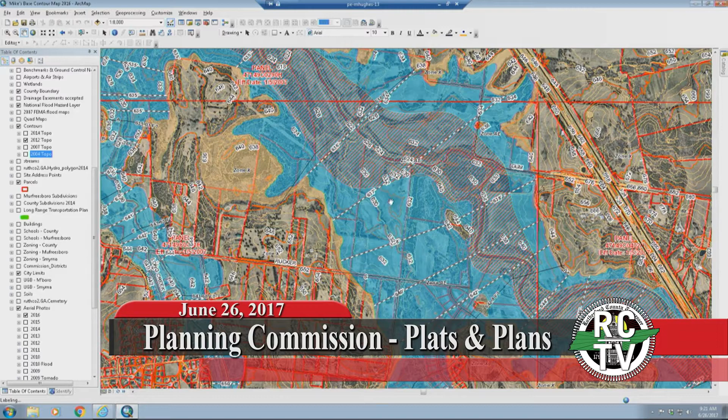So we're looking at a lot of fill on especially these lots in the back. So we're requesting that they provide us with individual lot grading plans, critical lot grading plans for all the lots, to make sure the houses are built up and protected from the 100-year flood. And just a few minor things. There's an existing culvert, I believe, underneath the driveway that crosses Buzzard Branch right here, and they need to show that. And then I believe that's about it. So

Does 12 have a house on it? No, that's just for the detention pond itself. All right, who's going to maintain that? They'll have to have an HOA to maintain that and serve that.

HOA. That's our favorite scapegoat. Yeah. Catchphrase these days. They'll be non-existent in 5 years.

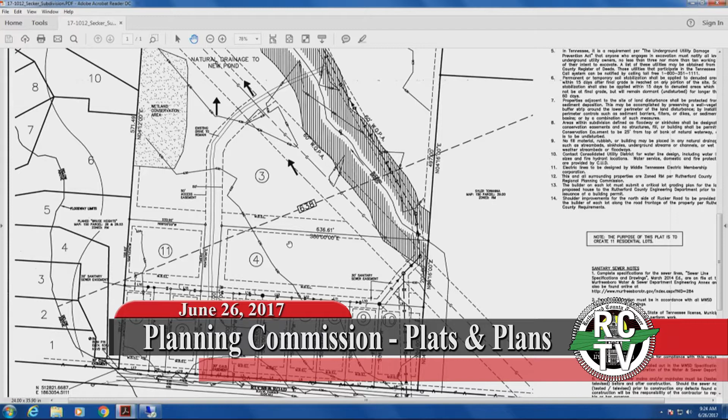Right. You can see the base flood elevations. It's 638 in this area right here, and there's an existing 632 contour. So they'd have to build the pad up, say like on lot 4. They'd have to build it 1 foot above that 638, to 639. So that's 6-7 feet of fill on lot 4 itself. So these are going to be some challenging lots to build on.

That's just for the house itself, not the entire lot, so. Right, we don't do the 15,000 square feet anymore. Yeah. Just the pad, like 5-10 feet out from it to protect the HVAC unit and the ductwork underneath the house.

Doug, your preference is to combine it between lot 1 and 2 to have just one access off of Rucker, or you're okay with 2? Oh, well, in that situation, I think what we're saying is like with 5 and 6, 7 and 8, something like that, pair the driveways so that they're closer together. Lots 1 and 2 down there, you've got lot 11 between it. I don't know if that'd really be an option for that one. But what we're trying to do is just minimize the number of cuts onto Rucker. There'll still be that many access points, but if they're paired, it's really acting as one. For all intents and purposes, it's really more 1 than 2.

Seems like there's still a lot of issues to be worked out with this one, from your perspective, or you feel like this is? Well, as far as our comments are concerned, there's a few things, but nothing that really would rise to the level of any kind of a deferral, I don't think. I'm sorry, we'll still need to see construction plans for the pond. We'll still need to see individual lot grading plans. That's why I was saying that all the property is in the floodplain, so each lot where they're proposing to build will need a critical lot grading plan. But those are things that would have to be worked out in the future anyway.

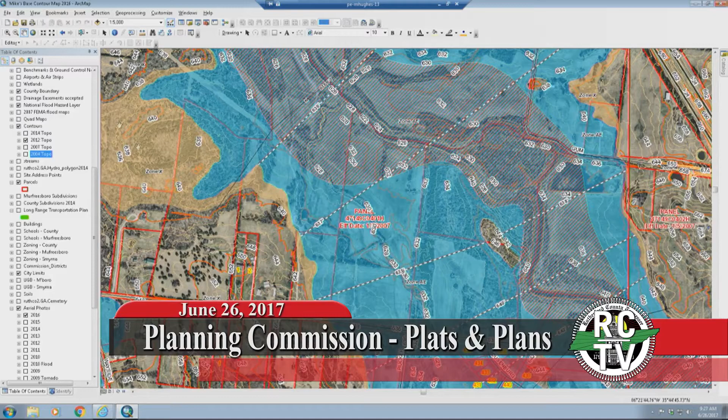All right, got another nice piece of property on the north side of Valley View. It is very, very steep. And these lots, you can see from the tightness of the contour lines that it's pretty steep. These individual lots will need critical lot grading plans up here on this side. You can see these large lots up here. They are planning to extend sewer, a force main to connect to the STEP system, so that won't be an issue for water or sewer. But just the steepness of the lots will require them to have critical lot grading plans.

And another issue I had was, like Doug mentioned, this intersection here. Right in here is a little bit too acute of an intersection. It doesn't meet our standards. We'll need them to flatten this out. We try to get the intersections at a 90-degree angle, especially if it's on a major route from Valley View. They can either come down Millstone Creek and then out to Jefferson Pike, or come down Ash Ridge and over to Jefferson Pike. So we feel that this is not going to be a minor local. It'll be more of a residential collector route where a lot of traffic is going to be coming through. So I'd like them to work on this intersection a little bit more.

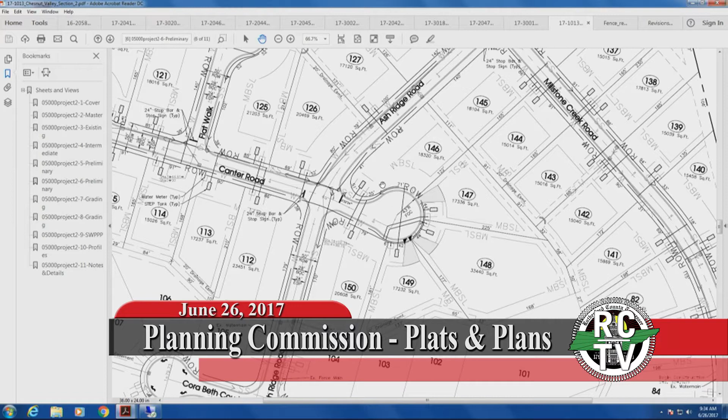Right now, their stop conditions are these two side streets, so people are going to be coming through there not stopping at all. So we need that to be two-way, not a four-way. Sir? A proposed two-way stop. So they're proposing a two-way and not a four-way intersection. So traffic's going to be coming through there pretty quickly, and just based on our regulations, we need it to be a little bit flatter, more of a 90-degree angle.

Would a four-way stop sign affect your decision on the angle? Well, we could do that. Well, and the fact that you have a cul-de-sac there. I'd rather see it worked on a little bit. I think they can adjust that a little bit and make that work without losing any lots. It just needs a little massaging, in my opinion.

Personally, I would like to support the county engineer, because if we start saying, well, this one's going to work at 80, next time we're at 75, and all of a sudden we start down the slope, and we've got a rule in place. I mean, it's all on paper at this point in time. I feel sure you can tweak this a little bit and make this work. Yeah. Well, we're currently at 83 degrees. Yeah. So we could bump that up a little bit. Thank you.

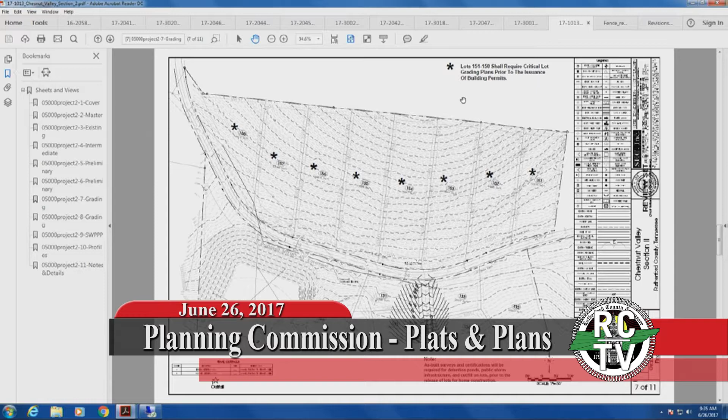But other than that, it's in good order. We'll catch a lot of stuff on the construction plan submittal. And like I said, the lots on the north side are pretty steep with these steep contours, so we'll need to see house plans from each one of those. And they have added a note saying that they are critical lots and will require critical lot grading plans. Questions for staff?

No further questions. I'll make a motion to approve subject to all staff comments. Second. I have a motion and a second to approve item 17-1013 Chestnut Valley Section 2. Ready to vote? All those in favor of that motion to approve, please say aye. Aye. Opposition? Motion to approve carries.

Next on our item is 6C, submitted for final plat approval, but before we get into that, I'd like to recognize longtime Commissioner Robert Stroop. Saw Robert walk in a few minutes ago, and it's good to see you, Robert. Back up here, you spent years and years, and you were a valuable part of not only this commission, but the community as a whole. Good to see you again. Glad you're here. Oh, yeah, very well, but I have to believe that was not detrimental to me. It was not. Good to see you, Robert.

Item 6C submitted for final plat approval. 6C1, item 16-2058, North Side Estates, Section 1, 60 lots, 58 are buildable, on 49.07 acres zoned RM, located along Lascassas Pike, State Route 96. Oakland Developments is the applicant. Doug. Yes, Mr. Chairman, thank you.

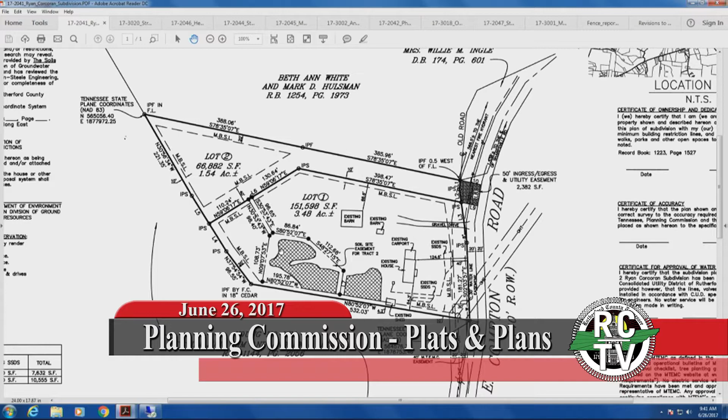It's just a little neater and cleaner when it's all on the same lot. Agreed. 20 years down the road and the houses have changed hands. If somebody goes to put in a pool or something, all of a sudden they're digging in the neighbor's septic system, or if there's a problem, you're over digging up the neighbor's property. I mean, I'm just a little bit uncomfortable. I don't want to start doing this on a large scale development purpose.

Recommendations? Questions? Staff okay? We're fine with it. I mean, for what they're requesting, like I said, it really would just be the one waiver if it wasn't for that little remnant portion out there. That just was a little unusual.

Is the lot to be sold for profit, or is it for a family member, or do you know the situation? Off the top of my head, I'm not sure if the applicant's present. Doesn't look like it. I'm not sure which it's for.

Need a motion? I make a motion that it be approved with all staff comments. Thank you, David. We have a motion and a second to approve item 17-2041, Ryan Corcoran subdivision. Any other questions? All those in favor of the motion to approve, please say aye. Aye. Opposition? The motion to approve carries.

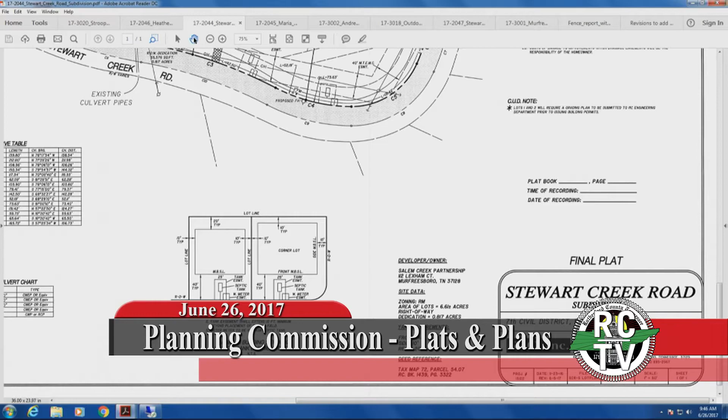They did add driveway culverts for lots 3 and 4, but they kept this note, two 30-inch culverts to be used for future driveway. The two 30-inch culverts are actually smaller than what will be required for lots 2 and 3. There'll be substantial size culverts. There'll be at least two 38 by 60 elliptical culverts probably needed for that one as well.

There's a large drainage area coming across Stewart Creek Road, and then get this mouse to work. Okay, and that goes across here and then to the northwest. So we'll need them to adjust that. And there's a large, what I was trying to turn on, come on now. Technology's great when it works for you.

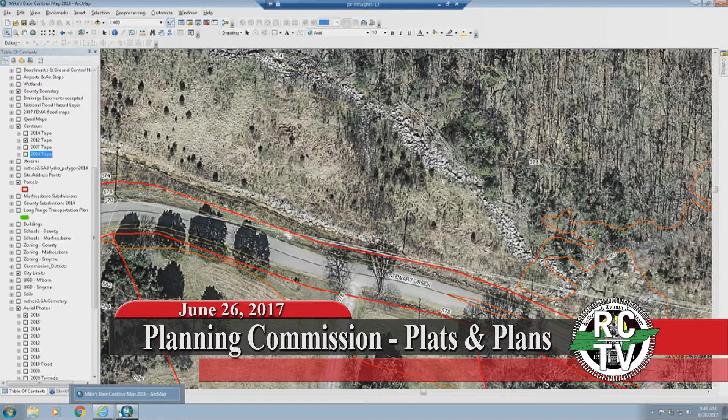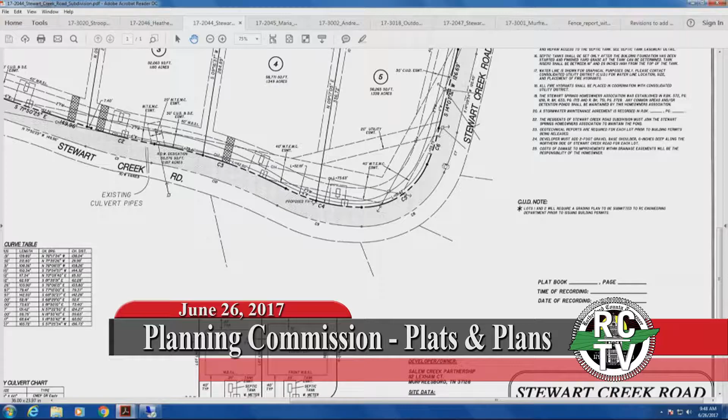There's a large drainage channel that runs through here that we need them to coordinate with CUD with the septic tank locations. Looks like they might be in that drainage area, these 2 lots here. Make sure those are pushed out of that area. They need to rework the numbering on their lots. They took out a note but didn't change the numbers, just minor things like that. But all in all, with those few changes, I believe the plat is in good order.

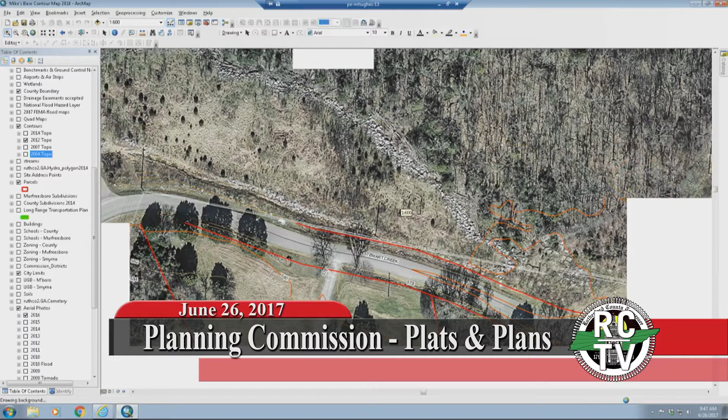Okay, note 23, I think it was numbered now. Geotechnical reports will be required for each lot prior to building permits being released. And the reason for that, you can kind of see on this plan, this was an old spoil area for Travis Estates subdivisions directly to the west. And it's just an old rock pile in here, so we're asking them to provide us with geotechnical reports for all this material that was just dumped in here.

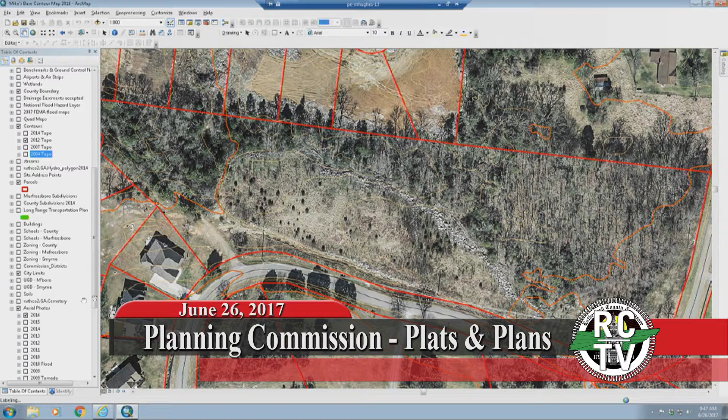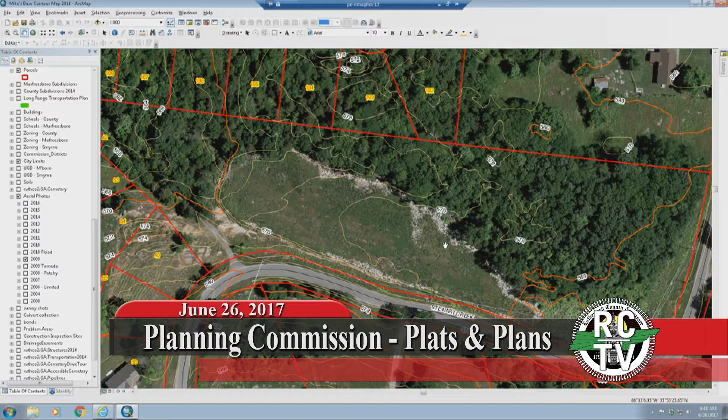I think you can kind of see it back farther in history. 2007. See, this is where it started to become a waste site. 2009, I think it's a little bit more, but you can see the outline of it. This is where they brought the material in. They'll just need to have that evaluated before the house permits can be pulled and make sure that they're suitable building sites.

How much will they do? They just do the site for the absolute house? Will they do driveway areas? Well, usually just where the house will go, and the area outside of that, just to make sure that the house won't see any substantial settling over time. And it's probably good building material. It just needs to be evaluated, possibly some of it removed and brought back in and compacted properly.

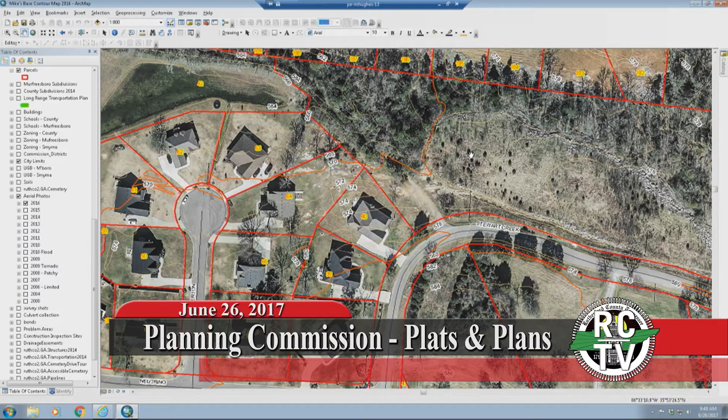I'll make a motion to approve subject to all staff comments. Thank you. We have a motion and a second to approve 17-2044 Stewart Creek Road subdivision. Any other comments or questions? Did you say it was the same developer? Yes, same developer, and it's a landowner that owns the pond, it's a farmer, and he did grant a consent to drain letter as well.

Other questions? All those in favor of the motion to approve 17-2044, please say aye. Aye. Opposition? Motion to approve carries. Thank you.

Item 6C5, Maria U. Adams property, item number 17-2045, 5 lots on 3.57 acres zoned RM located along Parsons Road. Maria U. Adams is the applicant. This also includes a waiver to the fire hydrant requirements. Doug. Yes, Mr. Chairman, thank you. This is another unusual situation here, and I'll try to explain why. The Planning Commission originally approved a 2-lot subdivision, Lot 1 and then Lot 2 as the remaining property, back in January of this year.

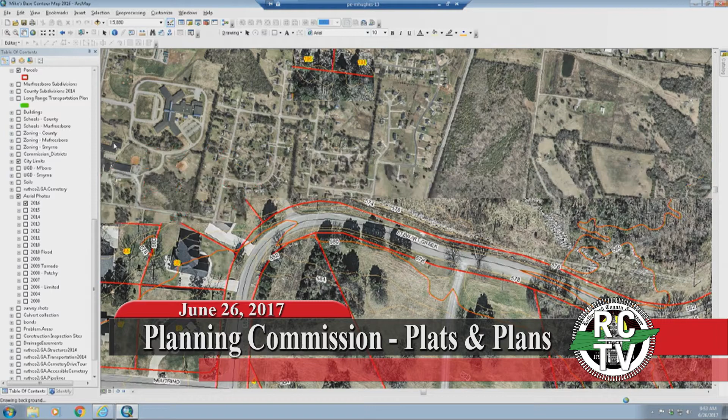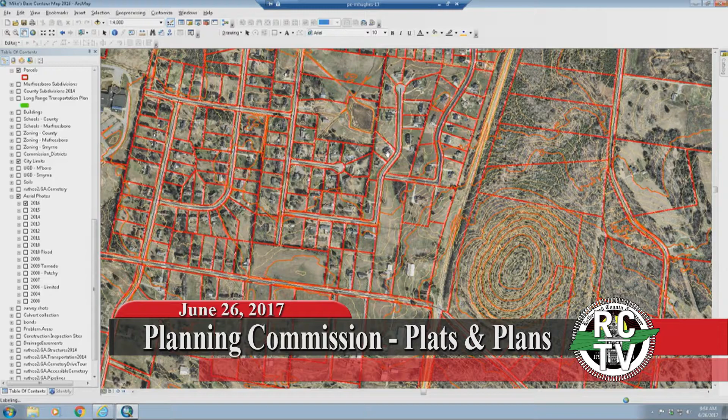Okay, this is the Maria Adams property here, and then this is a large pond that Public Works excavated to provide some more capacity in, and it does drain to that pond, but it's on somebody else's property. So without getting a consent to drain letter from this landowner, we need to know how the stormwater quality and quantity will be addressed for these new lots that are being created.

If they don't get a consent to drain letter, then they'll have to build their own retention pond, is that how that might work? Yeah, the way we work with them is to find a location on each lot, which will be challenging because of the soils area on each lot, because it's conventional septic systems.

Doug, Mike, either one of you guys, there's a number of things that have been brought up. Is this thing ready for final plat? I wonder how you're gonna use lot 2 at all. Yeah. Well, and quite frankly, let me pull that back up here. We had talked with the state officials at TDEC regarding some of this soil right through here, and said that even though this is shown as usable soil, for all intents and purposes, there's really not a whole lot you can do with this large stretch right here, because the width of it is not wide enough for the septic system, plus trying to get the driveway in there and everything.

So this may not be able to be counted as usable soil, even though they are showing a lot back here. So that's something the applicant's going to have to work through. This guy's going to have a driveway all across his front yard. Yeah, where's that house faced? The driveway's tucked in back here somewhere, number 3. I mean, looks to me like that would have been 4 pretty good lots, but you're trying to squeeze in 5 and making a mess. Exactly.

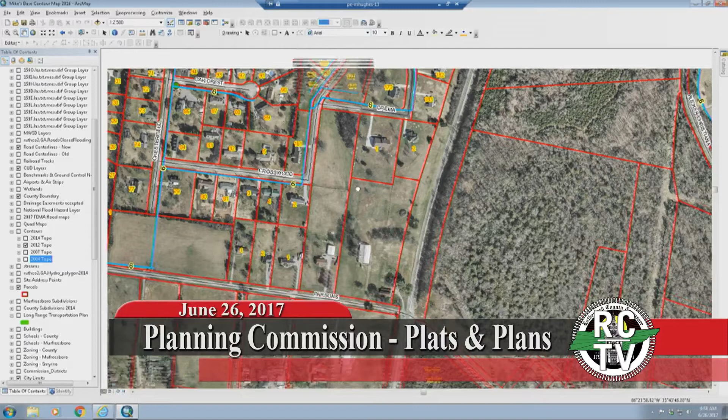So, I'm sorry, I might have missed it. The water line will not support a fire hydrant? Well, there's no water line there for lot 1, Parsons Road. Right, this house here and barn will be lot 1. The water line coming in the backside supports 2 through 6. There's an existing hydrant there already, a little bit farther up the road.

Okay. But that will cover those lots? These will be within range of a fire hydrant. And that one was already approved; the house was already built, so it didn't have to have a fire hydrant. So should there be a plat note indicating that that waiver only applies to lot 1?

Well, again, if they're going to record lots 1 and 2 separately, that first plat, then the subdivision we're looking at here would only be for lots 2 through 6. So it wouldn't have to, because lot 1 would just be all by itself. The note would already exist on the first plat that was recorded. But again, that was the question we had. Why not just do it all at one time?

I'm not comfortable. There's too many unanswered questions, I believe, for staff for us to consider this as a final plat. I'm going to make a motion we defer. Second. Let's see if we can get that drainage figured out before it comes back. Yes, sir. We have a motion and a second to defer item 17-2045, the Maria U. Adams property. Other questions?

Well, I'm just gonna add another statement here. We just did that in January, breaking into 2 lots. Now we're back breaking into basically 6 lots. I mean, I feel a little bit like we're being played here to some extent, you know, and I'm not comfortable with that 5 lots, that back half. It looked a lot better to me with 4. Personally, I don't like the way number 2 looks at all, so.

And can you see how much soil lot 3 has? I think they only had enough for maybe a 2-bedroom house, so maybe 3. Go down to the soils chart. Lot 3 only has 6,685 square feet, so it'll be a challenge to get 3 bedrooms out of that. Okay. All right, we've had a motion to defer and a second. Any other questions? All those in favor of the motion to defer item 17-2045, please say aye. Aye. Opposition? Motion to defer carries.

Thank you. Item 6C6, 17-2046, Heatherwood Section 4, 61 lots, 59 are buildable on 31.87 acres zoned RM, located off Florence Road. Gibson Development is the applicant. Doug. Yes, Mr. Chairman, thank you. The preliminary plan for this section was approved by the Planning Commission back in October of 2016. This plat is consistent with that preliminary plan. We did have several issues that we identified. Those issues have been addressed. I will turn it over to Mike. I know he had a couple of items on the stormwater side to address.

They have walking trails around the center retention, detention area. These are common areas, this long parcel here, but in a few places, and I'll zoom in to show you, you've got detention drainage easements coming and then just abutting this common area. We just ask that they extend the drainage easement across this common area. They are proposing culverts underneath the walking trail, so just to make it all above board, cut and dried, we'd like that to be addressed.

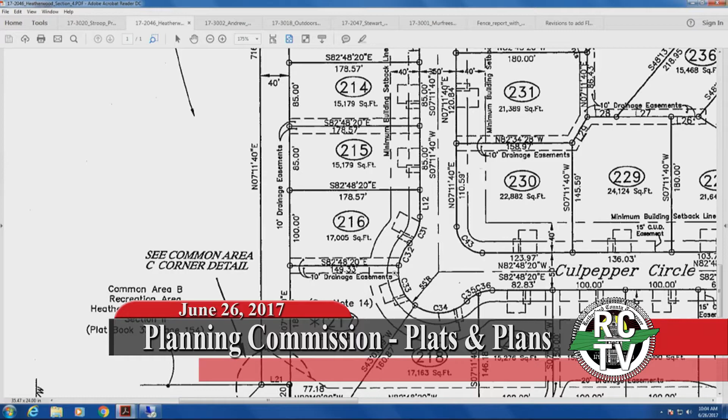And then also they need to tweak a note about the responsibility of repairing anything in a drainage easement. So if this is piped through here and somebody puts a driveway or a mailbox or something in that piped drainage easement, and we have to go in there and work on it, it's a note stating that it's the responsibility of the homeowner to replace that item because they placed it inside our drainage easement. It could be landscaping or anything, any kind of improvements. A lot of times we'll see driveways squeezed in here because of the large septic tank easement, the water meter easement.

But other than that, I believe they've addressed all our comments. So just a couple minor housekeeping issues. Those notes will be made on those lots so that a potential homeowner will know what he's... Yes, sir. Right. So it'll be recorded with the plat. It'll be closed. Make a motion to approve, subject to all staff comments.

Second. We have a motion and a second to approve 17-2046. Any other questions? All those in favor of that motion to approve, please say aye. Aye. Is there any opposition? Motion to approve carries. Thank you.

Item 6C7, 17-2047, Stewart Aaron Carlton subdivision, 5 lots on 2.6 acres on RL located at the southeast intersection of Highway 99 and Mount Vernon Road. Stewart Aaron Carlton is the applicant. Doug. Yes, Mr. Chairman, thank you.

This property probably looks familiar to commission members. This was the subject of a rezoning request to residential multifamily that was denied by the commission back in March of this year. After the meeting, the applicant didn't take it to the Board of Commissioners. He ended up withdrawing the application and then is now seeking to subdivide the property into 5 lots.

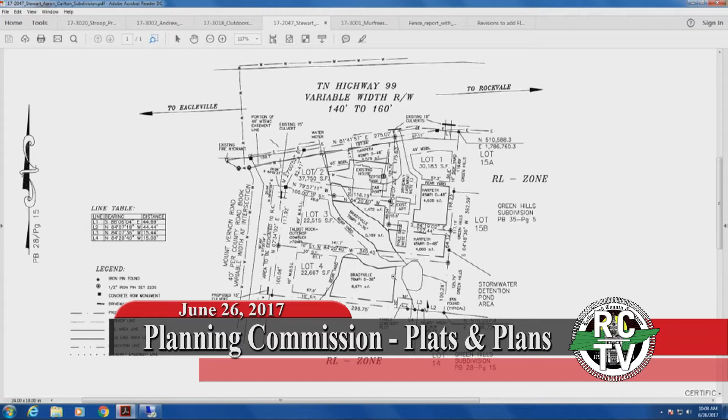He'll also need to trim out some old soil markings on here that just need to be taken out. The calculations that are shown on here actually are shown with the trim out area. He just didn't turn the lines off, and he said he would take care of that. So from that standpoint, those were a couple of the major comments that we still had. Mike, I think you had a couple of things that you wanted to discuss on that one. But for the most part, from our standpoint, this appears to be in fairly good order. I think you covered it.

Okay. And Mr. Tusar, Len Tusar, the surveyor, he is present. I guess, yeah, Brad, Aaron's here as well, excuse me. Where's your stormwater area? Can y'all point it out, or what are we doing here on drainage? Well, I guess that's one of the things we'll need to address. Mark, to my untrained eye, this is very confusing. It's hard to tell what's what. I agree with you totally, yeah.

Okay. Yeah, it had a comment: need to show post-development runoff is equal to or less than pre-development runoff, otherwise show how you'll mitigate excess. See, there's the existing house on lot 1. This could be a detention pond or individual rain gardens. This is lot 1. To meet Rutherford County standards, how will stormwater quality and quantity requirements be met for this project? So that's one thing we need to address on that too.

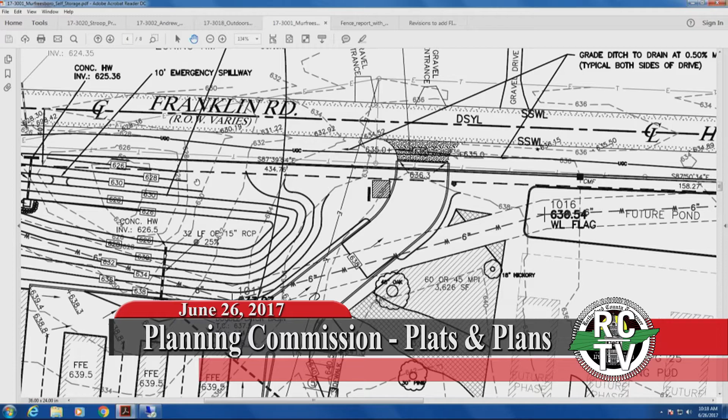So it's not connecting anything. We'll need them to fix that. Trench drain would be just a trench. Just a trench. Well, grate or something. Grate across it either way. Right, but it's got to be connected to the pond. Yeah, it should drain back into the pond. They could move it up farther in the driveway.

TDOT usually doesn't allow additional water running off into the roadway, and they usually have a note on the plan saying the pre-development flow for a 50-year storm meets the post-development flow for a 50-year storm, so they're not running any additional water onto them.

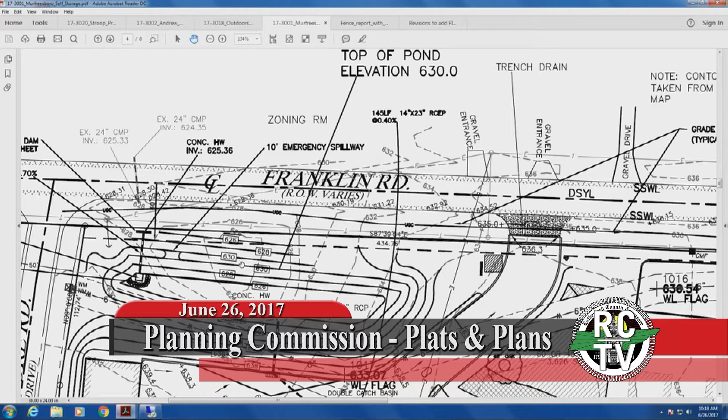This existing pond is actually a mapped wetland, so we'll have to get them to address that. I think it's small enough they won't need mitigation, but they will need some coordination with TDEC on that. Let's see what else. And just a few things like forebay designs for the pond, energy dissipation for the pond, details for those items. Let's see. And I believe that's all I had for that.

So just some more fine tuning of the plan and working with the utilities. With some grading operations going on in this area, like I said, we don't want to uncover too much of that water line and leave the water line susceptible to freezing. I didn't realize we could have a water line under a detention area. You say we can, I guess we can. Well, I've done it before in my previous career. As long as they can get to it and work on it, and maintain it.

It's CUD's water line. It's their easement. Took for granted they had an easement. I didn't know we could put something else in their easement such as that. My main question is, this is the PUD, and the PUD comes pretty much set in stone, and now we're adding 2,900 foot of building. Is that not a variation from the original?

Well, the original PUD, yeah, the PUD booklet didn't actually call out specific sizes. It did show the buildings. Now, what they're showing really isn't a deviation. The buildings are still where they were proposed to be. So from that standpoint, and that's actually a discussion that the applicant and I got into, because at first she didn't think she would even have to come back to the planning commission since the sizes weren't really mentioned in the plan booklet anywhere. But I said, well, that's really not the issue. The issue is the size that was approved originally on the site plan. But the buildings, locations, and setbacks and everything else that they're proposing, nothing has changed in that regard.

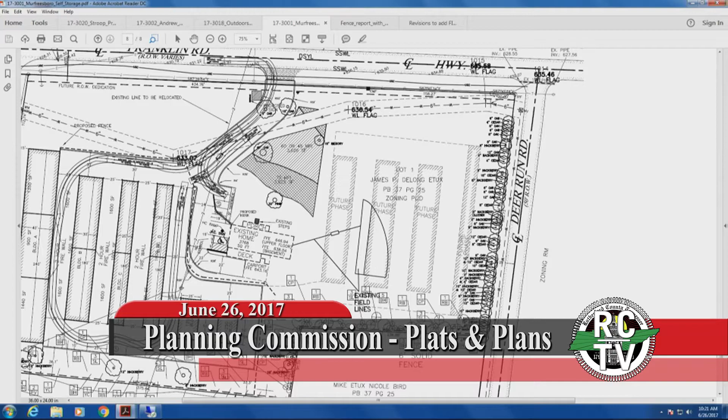I'm sorry, on page 2 of the plat, if you go just below the house, it's labeled proposed gate for future access. Is that just access from their future phase development? It's not access from Deer Run Road, correct? Correct. That'll be for this additional future phase in this area. And then while you're circling that, are we going to allow those buildings to remain labeled future phase when they're sitting on top of field lines? That's why they identified this area up front by the driveway, and this mouse is not liking me anymore. Right here. So once they start this phase, they'll have to move their septic system to this area.

Is there buffering on the landscape plan for Baltimore Road on the Baltimore side? There is. Go ahead and. Well, they're actually going to. You better drive. It doesn't like me for some reason. Let's see. Back one. Okay.

They're actually using the backs of the building. These will be kind of dressed up a little bit more. The back of this building will act as a wall, as a solid visual screen, as well as some landscaping along here, along Baltimore Road. Okay. So yes, they will have to do that. Now they're proposing to use a lot of these as tree credits. You are permitted to do that. Again, the landscape plan is still, I think, kind of a work in progress. I know that the applicant had some issues with what was being proposed, and we'll work through that, but we'll make sure that it meets our regulations as far as screening and landscaping.

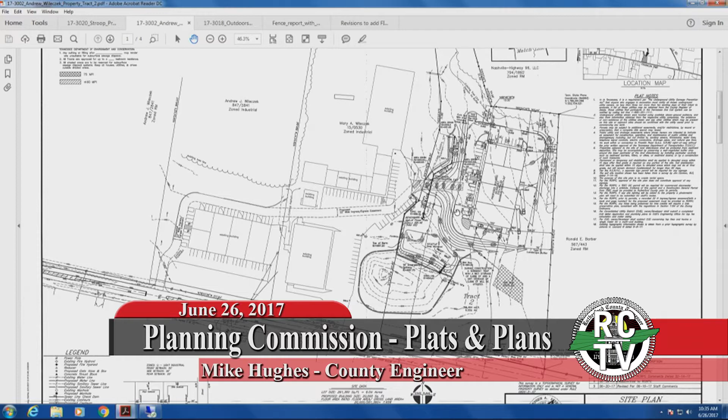Let's see. Doug had a note about tree preservation for tree credits on there, and then just some minor tweaking on that, but like Doug said, they have addressed most of our comments. Staff recommendation. I mean, we're okay with this. I think we recommend it can move forward. Motion to approve. Second. We have a motion and a second to approve with all staff comments.

Item number 17-3002, Andrew Wilczek Property Tract 2. Other questions? All those in favor of the motion to approve, please say aye. Aye. Is there any opposition? Motion to approve carries. Thank you.

6D3, 17-3018, Outdoors Unlimited, conversion of 5,252 square feet existing building to non-residential equipment storage, proposed construction of 4,260 square feet carport on 2.8 acres on PUD located along Rockvale Road. Burke Skelton is the applicant. Doug. Yes, Mr. Chairman, thank you. Again, this is another zoning application that should look familiar to you. This is along Rockvale Road. The property was rezoned to planned unit development by the Board of Commissioners back in April of this year.

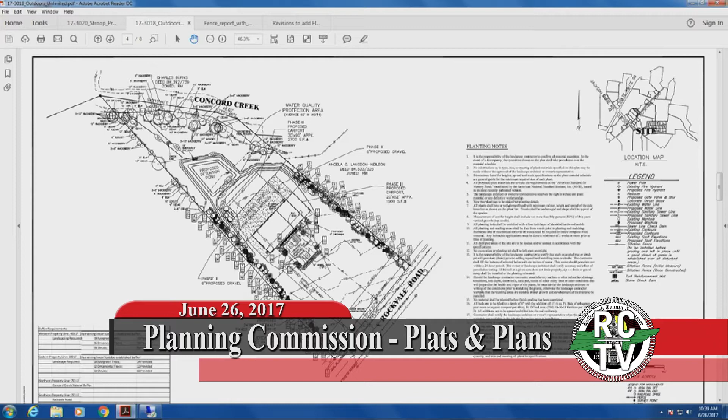And like Doug said, they are proposing a lot of vegetated screen on either side of the property and around the parking area, and they're keeping this buffer in the back along Concord Creek. Staff okay with moving forward with this? Yes, I mean, like we said, some tweaking, but for the most part, it's in good order.

Motion to approve based on staff comments. Thank you. We have a motion and a second to approve item 17-3018, Outdoors Unlimited. Other questions? I have a question. It says that the closest fire hydrant is over 1,000 feet away. Are they adding a fire hydrant? I don't think the line in that area will support it, it's a 4-inch line. Yeah, but they'll have to work with Larry Farley, our fire chief, as far as any proper fire protection measures in the actual building itself.

Other questions? All those in favor of that motion to approve, please say aye. Aye. Any opposition? Motion to approve item 17-3018 carries. Thank you.

6D4, item 17-3020, Stroop Property Building Addition, new construction of 7,500 square feet of light industrial space on 25.89 acres zoned LI located at 4700 John Bragg Highway. Robert Stroop is the applicant. Doug. Thank you, Mr. Chairman. Our last site plan that we have today, the applicant is proposing to construct a 7,500 square foot building as well as some lean-to structures. It does not appear to be attached to the building. It's been confirmed that it's not.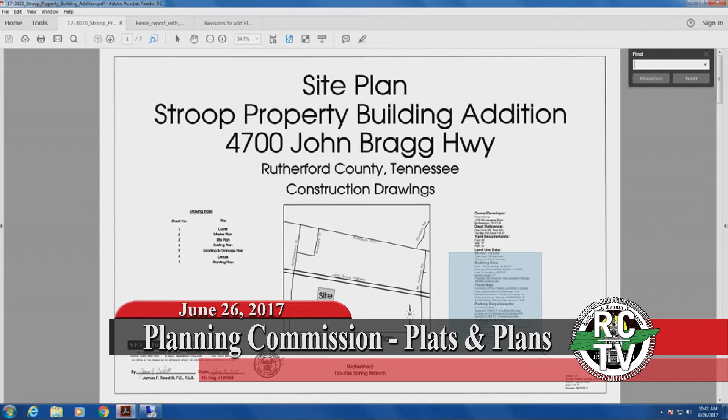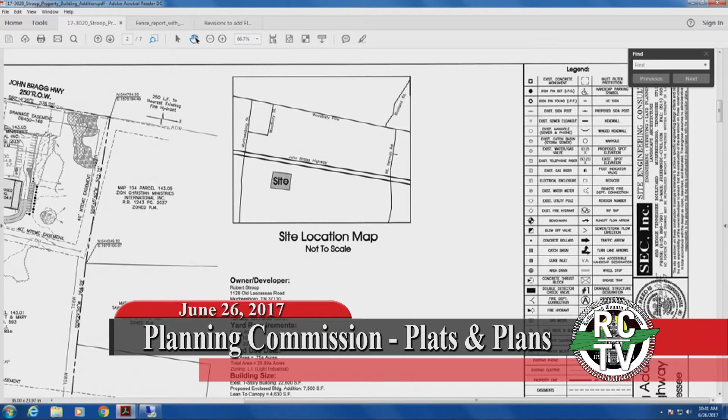We have asked them to make several updates to the plan. Most of our comments have been addressed. One of the comments that we had is on the first page. Let me just zoom in there. I hit the wrong button, hold on a second. There we go. They had originally included just the proposed building addition, but they weren't including the lean-to canopies and all that as far as the building size and the data. They've updated on the title page, but on the pages moving forward, they're still just showing it as the building itself. So we just asked them to update that. That's a minor change that can be done pretty quickly. This is just a master plan of the property itself, as you can see.

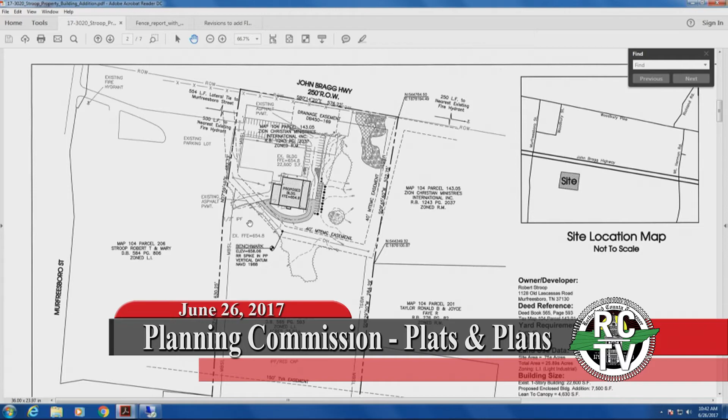Also, one of the other issues that we identified on the site plan, they're showing access to the adjacent property. It all kind of functions as one piece when you look at the master plan. This is all kind of interconnected, but we'd like to see some cross-access easements between these, just so everybody knows in case the property ever got sold. Right. So that the permissions are there for cross-access, even though there currently is cross-access. We'd like some more firm documentation on that. We also wanted to see a truck turning template through the site just to make sure that everything was up to snuff. But besides that, I think Mike may have a couple of things.

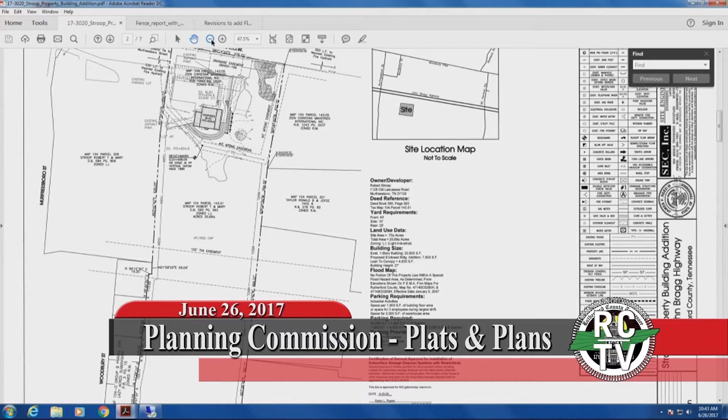We need some more information about the use of the addition. What is it going to be used for? And then the area was mostly paved and compacted gravel in the back, so there's not going to be that much of an impact on stormwater, but we just need to have the finalized calculations to make sure we're not increasing the runoff anywhere on the site. But other than that, they've addressed most of our comments. Recommendation? We're fine with it moving forward.

Very good. Motion to approve. Second. I have a motion and a second to approve item 17-3020, Stroop Property Building Addition. Any other questions? All those in favor of that motion to approve, please say aye. Aye. Any opposition? Motion to approve carries. Thank you.

We're getting into staff reports and other business. Let me just say that there's been a couple of things that have come up that we've questioned and have deferred, and staff has had at least 18 items on this agenda that they've had to deal with as well, and I commend you guys for dealing with such a workload and getting to us in such a manner that we can get through it in a couple of hours. So even though we've had to defer a few things, I think you guys will agree that that's probably the right thing to do, and to come back to us with more information that we were looking for.

But to work through that kind of a workload with what you have available to you is nothing but amazing. Thank you, staff. You've done a great job. Appreciate you. Discussion of fence regulations.